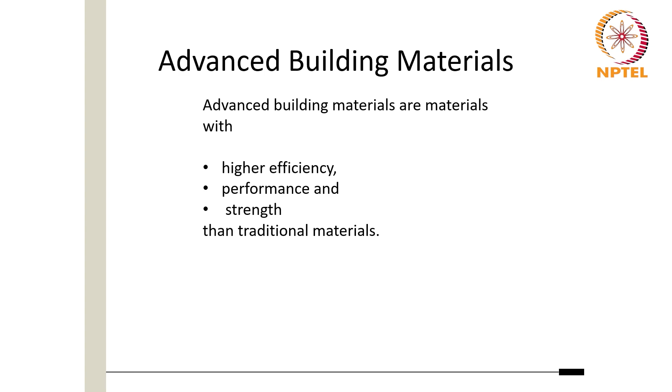So what are advanced building materials? Advanced building materials are materials which have very high efficiency in their performance, and very high efficiency even in terms of strength as compared to traditional building material.

In order to deal with all these environmental impacts, we need to think and reconsider use of any other building materials than what we had been conventionally using. In this context, we have seen traditional building materials, advanced building materials, and innovative building materials. Today, we will see advanced building materials.

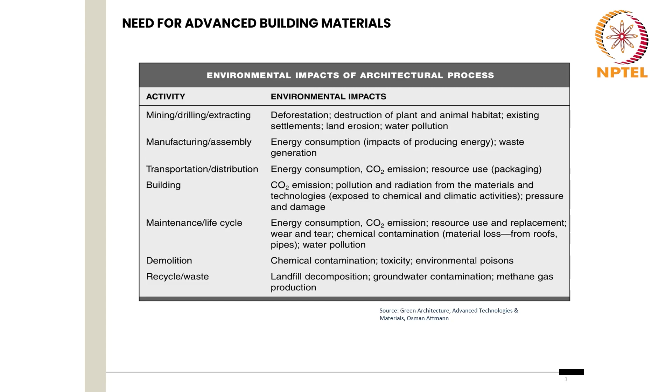So, why advanced building materials? We have already seen and discussed a lot that the most important environmental threat associated with production is not so much the depletion of non-renewable raw materials, but instead the environmental impacts caused by its extraction.

New advanced materials offer opportunities to change how we construct and retrofit buildings. They give added value in terms of increased performance and functionality. Reduction of carbon footprint for construction materials can start at the production stage itself, where energy efficient processes can be developed and waste or recycled materials can be employed.

New materials can also help address new challenges of durability in a changing climate. Technology continues to create new building materials with exceptional properties. Composite materials are made by combining different types of building materials. These materials combine organic and inorganic components. One material acts as a type of adhesive that binds the other components together. Advanced building materials include photovoltaics, nanotechnology, and use of innovative technology too.

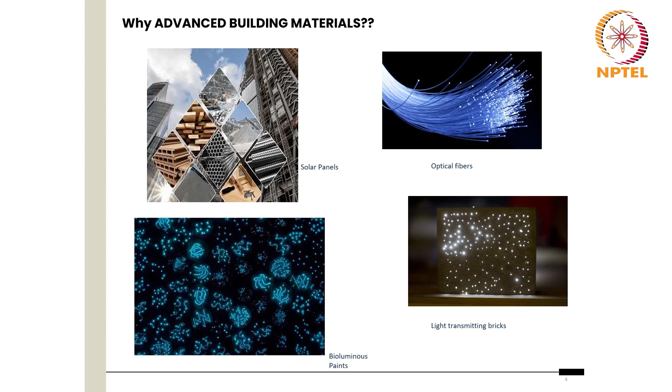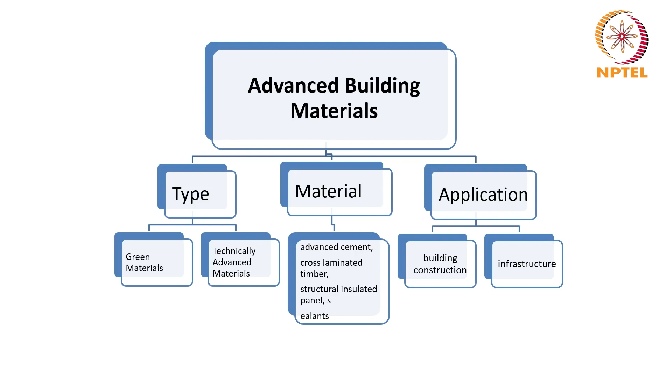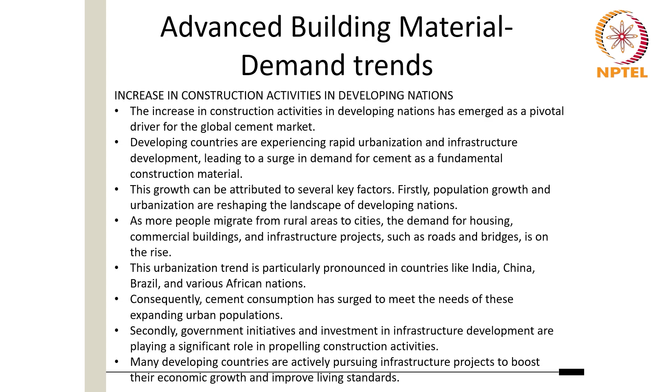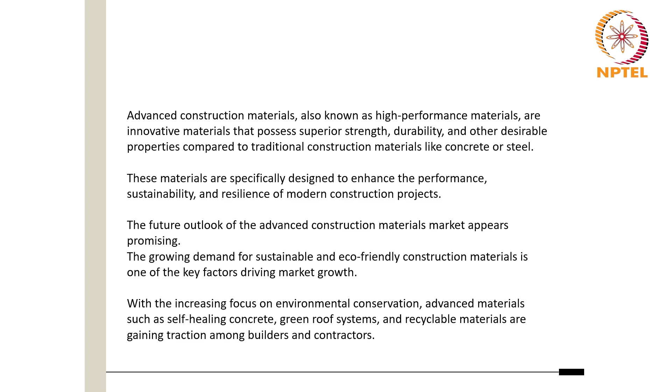The future outlook of the advanced construction materials market appears promising. The growing demand for sustainable and eco-friendly construction materials is one of the key factors driving market growth. With the increasing focus on environmental conservation, advanced materials such as self-healing concrete, green roof systems, and recyclable materials are gaining traction amongst builders and contractors.

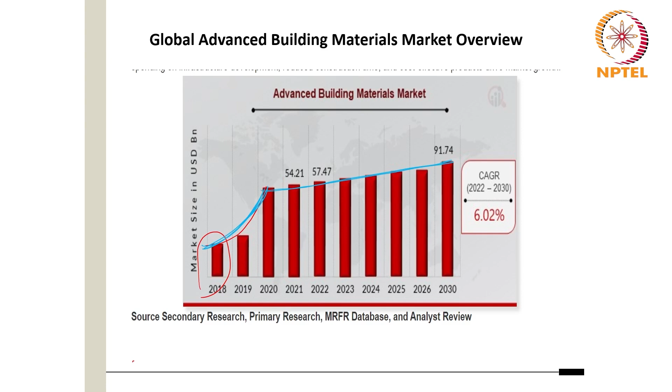Out of these advanced building materials, if we look at green materials as against technically advanced materials, the advanced building material market is categorized into green materials and technically advanced materials. Green building materials are non-toxic, environment friendly and green, leading to improved occupant health, lowered energy cost and reduced energy consumption. Green materials are expected to exhibit very high levels of environmental response in a very positive manner.

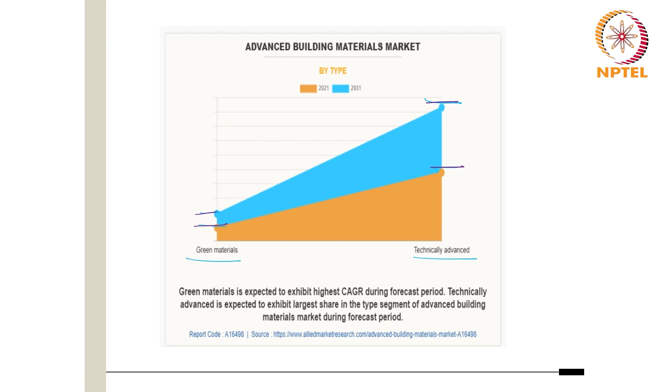Technically advanced materials are modern techniques and practices that include the most recent advancements in materials technology, design procedures, quantity surveying, structural analysis and design. These are all covered under this segment. Technically advanced is expected to exhibit the largest share in the type segment in advanced building materials market during this forecast period. Hence, we can see a rise in the requirement of both green materials and technically advanced materials, in the next decade from 2021 to 2031.

Now, by materials, if we look at the classification of advanced building materials, the market is classified into advanced cement and concrete, cross-laminated timber, structural insulated panels, sealants, and others. Advanced cement and concrete offers properties such as high-strength concrete, high-performance concrete, ultra-high-performance concrete, stamped concrete, and self-consolidating concrete.

Cross-laminated timber is a type of prefabricated engineered lumber that consists of layers of cross-stacked timber joined by structural adhesives on the wider side and sometimes even the shorter side. Structural insulated panels, or SIPs, are high-performance building systems for residential and light commercial use.

The panels consist of an insulating foam core sandwiched between two structural faces, usually like an oriented strand board. Sealants are materials used to block the passage of fluids through openings in walls or corner passages in a constructed building or infrastructure. It is a type of mechanical seal.

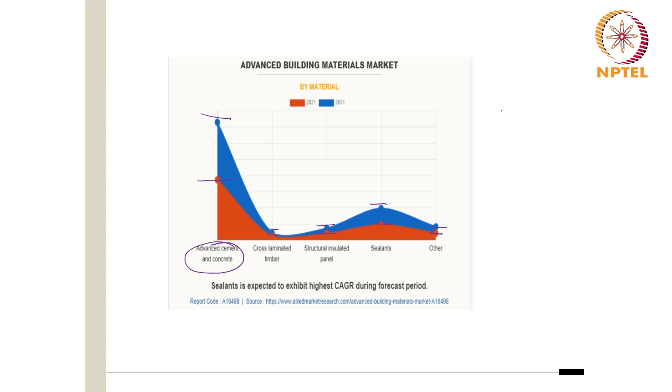So overall, during this decade, when we look at material-wise segregation, we see heavy demand in the next decade for advanced cement concrete, cross-laminated timber, structural insulated panels, sealants and others.

If we look at material with regard to material type, again you can clearly see how there is an exponential demand in the requirement of advanced cement and concrete, cross-laminated timber, structural insulated panel, sealants and others in the period between 2021 to 2030. So one decade is going to create a demand for advanced building material very exponentially.

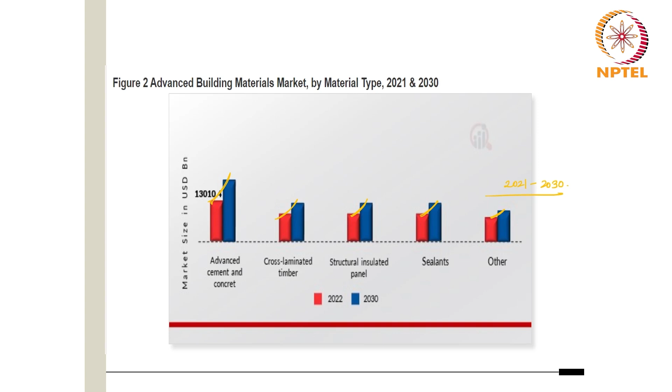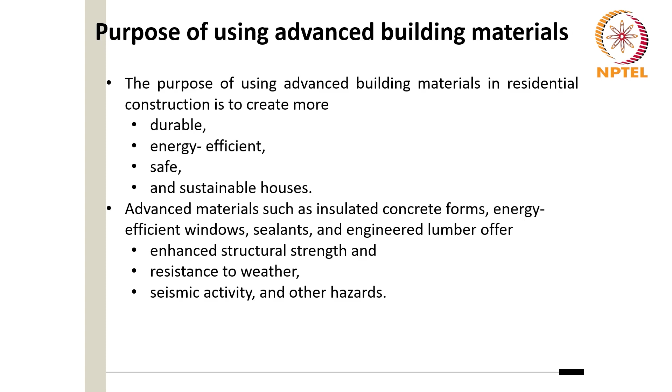Let us look at the purpose of using advanced building materials. The purpose of using advanced building materials in residential construction, or any other construction, is to create more durable, energy efficient, safe and sustainable buildings. Advanced building materials such as insulated concrete forms, energy efficient windows, sealants and engineered lumber offer enhanced structural strength and resistance to weather. Seismic activity and other hazards are also safeguarded if we use advanced materials.

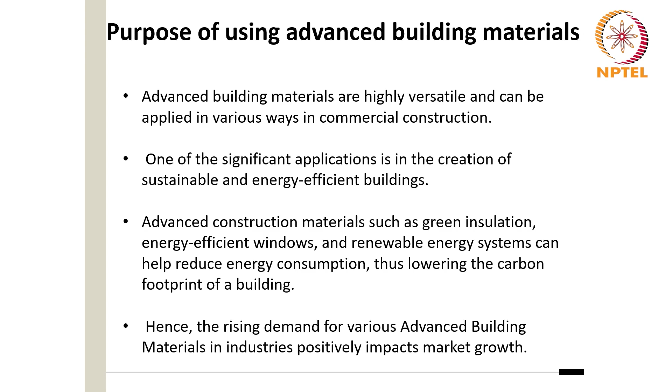Advanced building materials are highly versatile and can be applied in various ways in commercial construction. One of the significant applications is in the creation of sustainable and energy efficient buildings. Advanced construction materials such as green insulation, energy efficient windows and renewable energy systems can help reduce energy consumption, thus lowering the carbon footprint of a building. Hence, the rising demand for various advanced building materials in industries positively impacts the market growth.

Let us look at the examples and benefits. This category, which includes ultra high strength concrete, offers higher strength and rapid setting. Self-healing concrete offers improved insulation. Quick setting sealants offer enhanced water resistance. 3D printed concrete based on the additive can offer fire resistance.

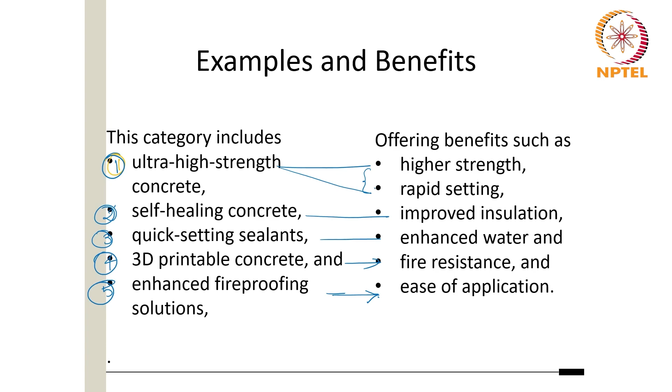Enhanced fireproofing solutions can offer ease of application. Hence, for every advanced building material, there is a very strong basis and strong benefit that it is likely to offer.

Let us look at this in terms of application. By application, the advanced building materials market is divided into building construction and infrastructure. Building construction application requires advanced building material that is technologically advanced, specially made to support the construction of robust and long-standing buildings. These materials are used in the construction of all kinds of buildings such as industrial, residential and commercial. They are composed of concrete admixtures, polymer composites, adhesives and sealants which help enhance the structural integrity of the building.

The infrastructure segment in application is the collection of facilities and systems that serve a country. These include the services and facilities required for the economy, households and businesses to function. Infrastructure is expected to exhibit the highest CAGR in the application segment in advanced building materials market during the forecast period.

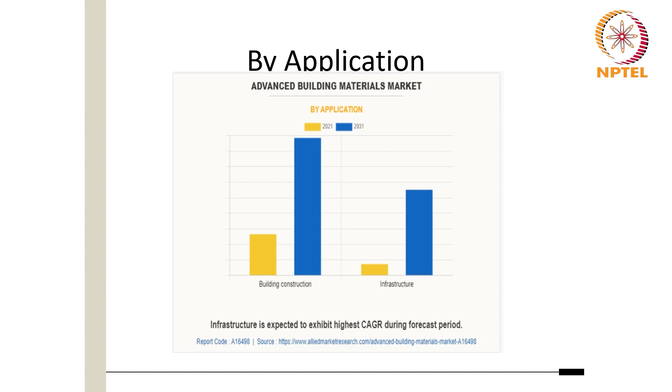Finally, we look at the advanced building materials market, which is expected to grow at 7.1% by the year 2031. The global advanced building materials market, valued at 56 billion in 2021, is projected to reach 111 billion by 2031. So, advanced building materials can be defined as materials that are more sustainable and have superior technical properties than conventional building materials.

So, with this, we will come to an end of this segment, which was an introduction on advanced building materials. We saw, after classification, what these green materials are in terms of buildings and infrastructure. We will look at yet another interesting topic in the next class. Thank you.